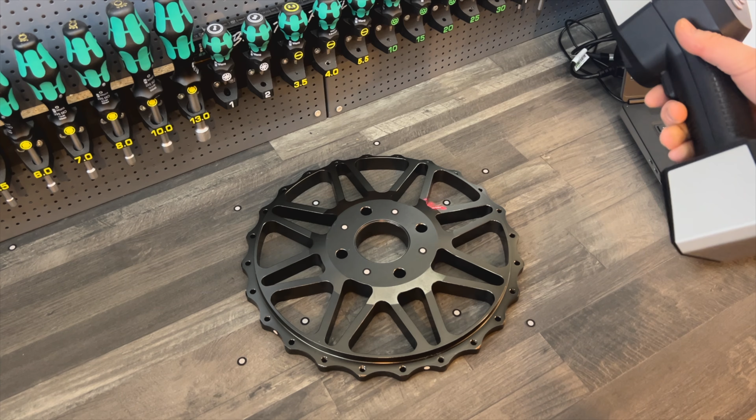So I'll set the point spacing to 0.5. I have reference points on the part. Then I'll capture the reference points, and I have the red laser in the center here. I can use that to determine the correct distance from the scanner to the part. So now I'm just collecting the reference points, like so. Close that and then click next.

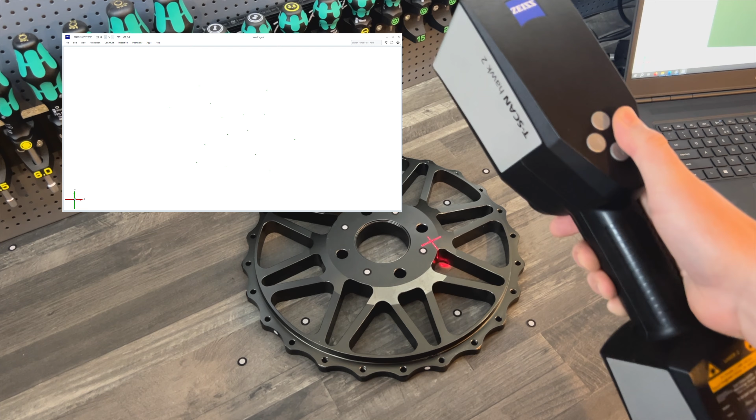I'll define a background plane, and that's the points I put on the table, and then an offset of 3 millimeters, and then everything below that will be deleted. And now I'm going to scanning. So I'm scanning the part here, and because this is dark and quite shiny, I'll try to use the exposure mode dark and shiny instead.

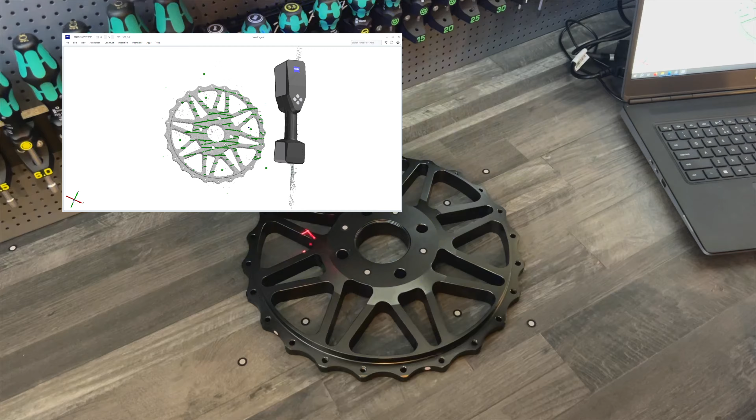So this was the one side. I can then click next, and then I can scan another side. So change this here, and again collect the reference points. So this is a new scan series. And then define the background plane in this as well. Go into scanning, and it has remembered the exposure mode, so I can just continue.

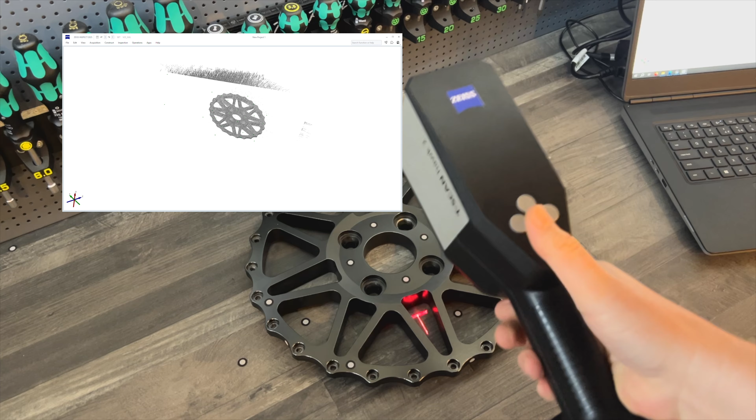So in a couple of seconds, I believe I have everything like so. Then I can click next, and I can transform the measurements. And because the points are both on the table, I can go in and do it over here. So all the points, and then just select the ones I have on the side. Go in and say finish scanning, and polygonize. And this will just take like a couple of seconds.

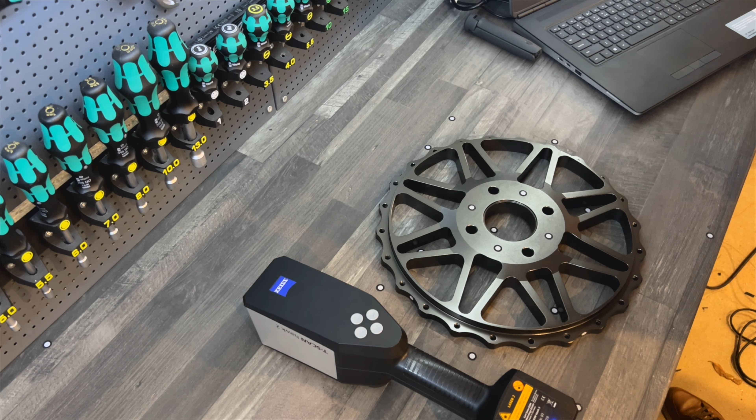And now I'm at the screen, and I can check with my mouse here. Yeah, and this is a reverse engineering for one of my good friends for his race car. He wants to change this part here, so I'll be drawing it up again. So the idea here is I want to show how you can get the most out of a 3D scan with free software. I'm using Zeiss Inspect 2025, and afterwards I'll be constructing in Fusion 360 with the hobby license.

So here in Zeiss Inspect, I want to construct an alignment, because now it's not aligned with anything. So if I select here, you can see that the part is not straight according to the coordinate system. For this, I need to construct some elements. So I want to use the mounting surface here. So I'll go in to construct a fitting plane. And then I want to construct the cylinder in the center here. So construct fitting cylinder, selecting in here, and then lock it with this one of the bolt holes.

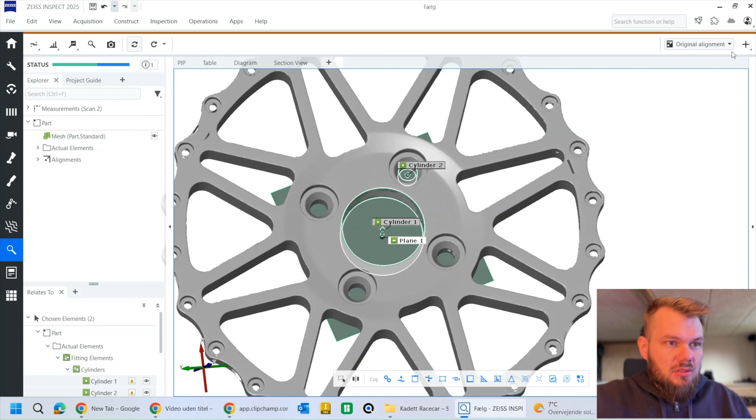So I'll go into my alignment up here, and the geometric elements is not up here, so I'll just define the original as initial, and now I can go in and choose by geometric elements. So first I select plane 1, I'm holding down control. That should be my plane Z, and then my cylinder 1 should be my line Z, and now the cylinder 2 should be my line X. Now it jumped into the coordinate system, so if I look here, this is what it looks like. So it's aligned to the coordinate system now. I'll just press OK.

Because in Fusion you can't import points and sections and so on, I'll just do an inspection report in Zeiss Inspect and use those numbers to construct in Fusion afterwards.

So here I'll take my mesh and drag it out. Now I need to construct what I need to use in Fusion.

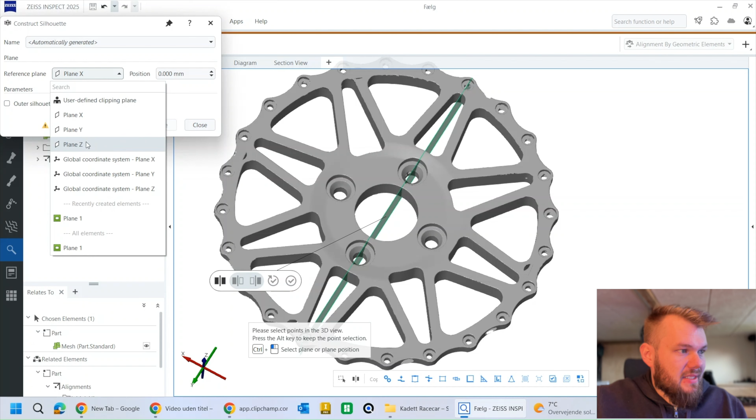I will construct a section, and then I can do a silhouette section, using the plane Z. That's also the mounting surface on the bottom, and if I set this to 0, this will be the 0 in the coordinate system. Then I select all down here, create and close, and press E for exclusive, and now I have the silhouette of the rim down here. From this I can start constructing the elements I need to measure where everything is.

First I'll construct a fitting circle in the center here, circle 1, and if I align it, you can see this one up here. I will also have a cylinder here, and I want to have this one as well.

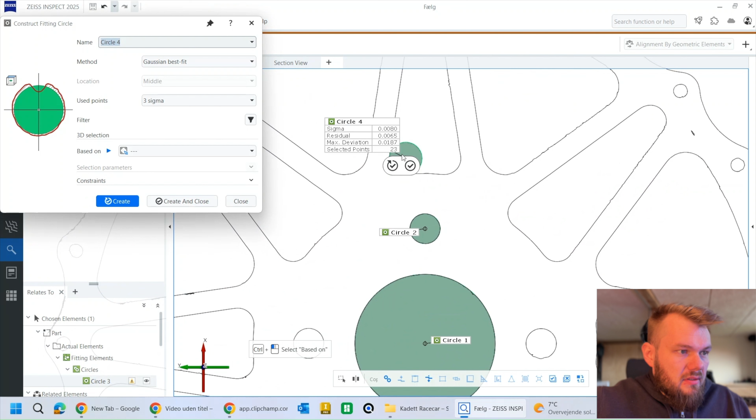In Fusion I'll just know the number of holes up here, and then I can construct it there. I also want the dimension here and on the other side, and then the top, and then from this here and here and over here. I can see it didn't get everything in, so I'll try clicking again.

Now we got the correct one. Then we have this triangle, and then this over here, that's different as well. So I'll construct these elements here. Then I need to have the big circular thing from all of these.

So I will do some selections here, and in Fusion I will probably need to adjust these, because this would be a point-something dimension.

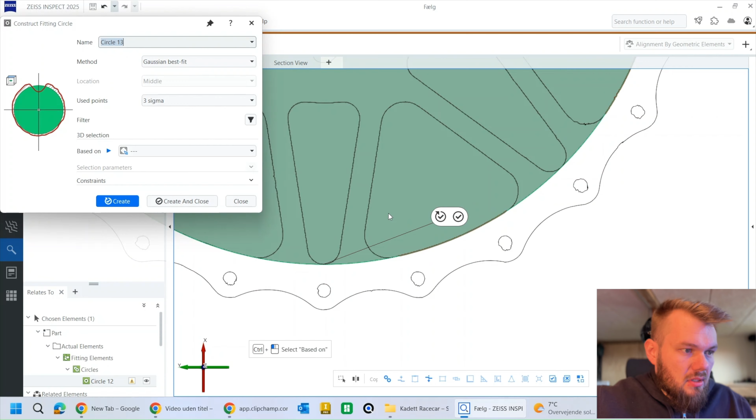Let's select all around here, and this makes more sense when you see the actual diameter of this here. And then we just need this up here, and then we got it all. So this, I have the big one, great.

Now I also want it for this, so the longer triangles, and then afterwards I think we have almost everything. Then it's just the outer thing here.

So now I will turn off circle 13 by selecting and pressing I, and I'll do it again here. So this one, and I'll make sure I don't select any of the curve, because then this will be way off.

So the software is just doing a fitting element from the selections I have done. So I have this one here as well. And then I want to have the small one up here. So I'll do the selection again. We got this, and then this one, and I'll do a selection here as well.

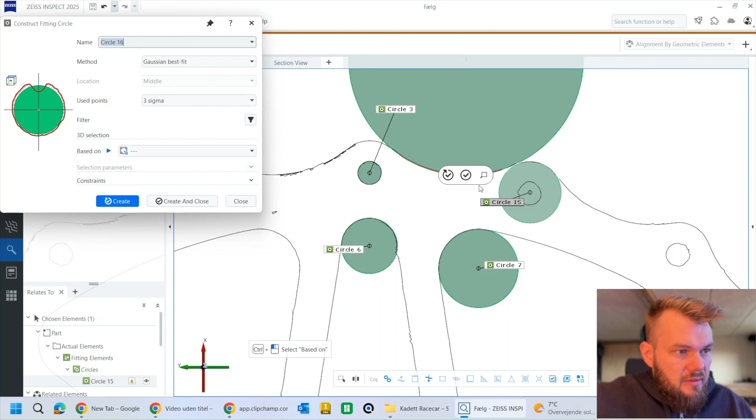I actually think we have most of what we need to construct this again, so create and close. Now I just need to do some dimensions.

So I will open up my geometries. I have my fitting elements, and then my circles, and the number 1 is the center. I'll take that and drag it out. So this is this one here, and a triangle.

So I have here the bolt hole and one of the triangles I need to measure, and then the outer bolt hole. So I will go into construct, and then I need to construct a 2-point distance from this, and we'll take this one here first. But I can see it right here.

I will do a complete inspection, so we get an inspection report that we can look into when I'm in Fusion 360. So great.

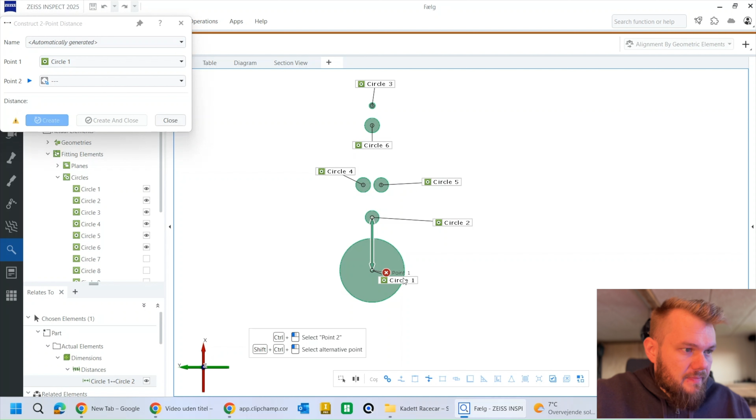And then this one here, and this one up here. You can do this one as well, and then the last one up here, pretty close.

Now all of these are selected, so I will open my Inspect and go in to check a distance in X, and press OK.

So if I take this one and select the dimension, drag it out here, and I can turn this off. And then this one, like so, I can turn this off, and this one here.

And this one. Take this and drag it out here. And then we have this one.

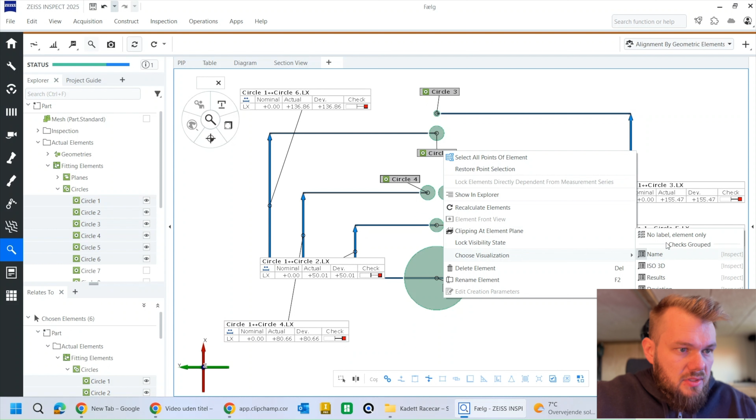Now I can select here what I don't need. And then I'll just select the circles here, press right click, choose visualization, and no label element only. Now I want to turn on my section so we can see the inspections here.

Then I'll take a picture for a report page, and I want to have it as a 3D like this, and then I'll press the edit button, and then we can go in and edit this so it will make sense afterwards.

So take this here. I usually like to do it like this, so it's easy to see what we are working with. And this here. And then we have the last one, like so. So now you can also see the numbers.

I don't have a nominal element, and that's because I don't know what it should be exactly. And then I will have the actual, so that's the measurement itself. So 136, 50.01, and this, where do we have the other side?

So that was to the bolt hole, and 155.47, 80.64, and 80.66. I also want to have the distance from this here, from the center.

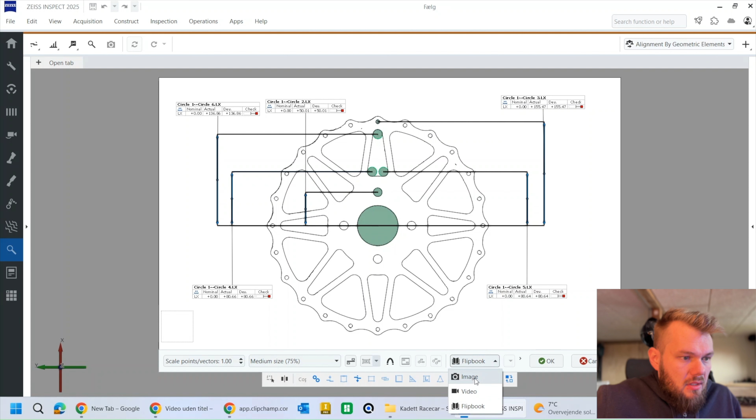I'll just say image here and press OK, and press OK to this. So this was the...

My dimensions. So this one here, circle 1 to 5, my actual elements, dimensions, distance 1 to 5, this one, and then we can do a check in Y direction. Press OK. So we get this.

Actually, I think I'll take it, drop it down like this, and then we can turn this off again and do another one and edit to make it look a little better.

So this one down, this one up, and this one up. So now this makes sense for me, so I can start constructing this here. Press OK, and OK to this one.

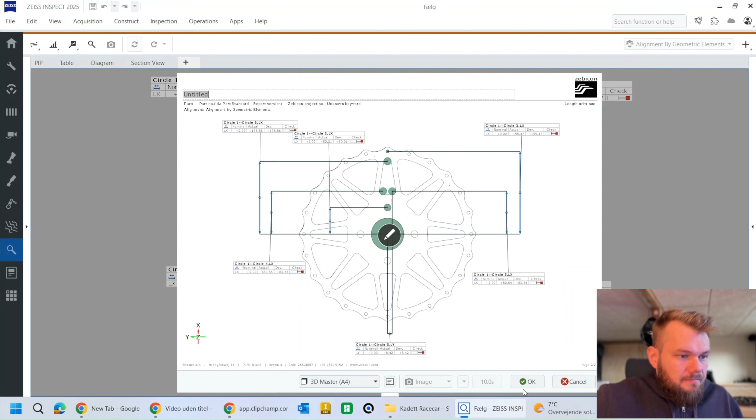And now I want some of my other circles, so I will turn these off. So this one. So select this, and press E for exclusive. So now circle 7, 8, 9, 10.

So I want to do the inspections here as well. So construct, distance, 2-point distance, and of course I need the center, that's circle 1. So from circle 1 to circle 7, create 1 to 8, 1 to 9, 1 to 10, 1 to 11, and 1 to 12.

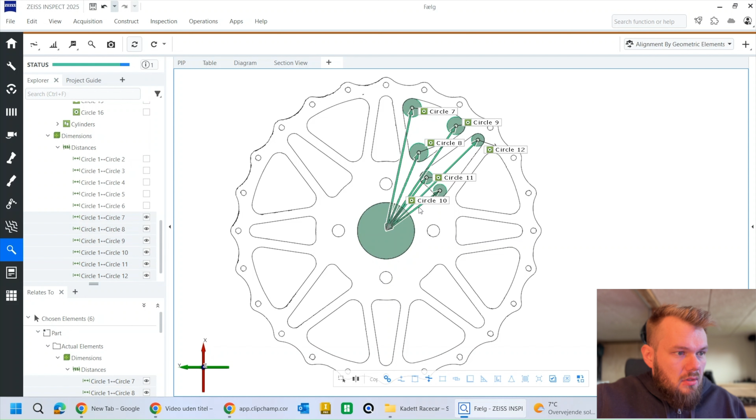And all of these I want to have both the X and Y direction. So this one here, I actually have to select them all, because I want X and Y for them all, I can go in and press X and Y. And now I have these dimensions here as well.

So this quickly gets a little crowded, so I will try to focus a little bit, turn off the circles so it's easier to see. And then we can take this one, and then this one.

And turn this off, and then we will take this one, and then this one, and this one. Then we'll take this out here, and this up here.

So this quickly gets a little crowded, and then we'll take this and this, and then we'll do this one here, and then this one, take it down, turn this off here, and then this one down as well, turn this off.

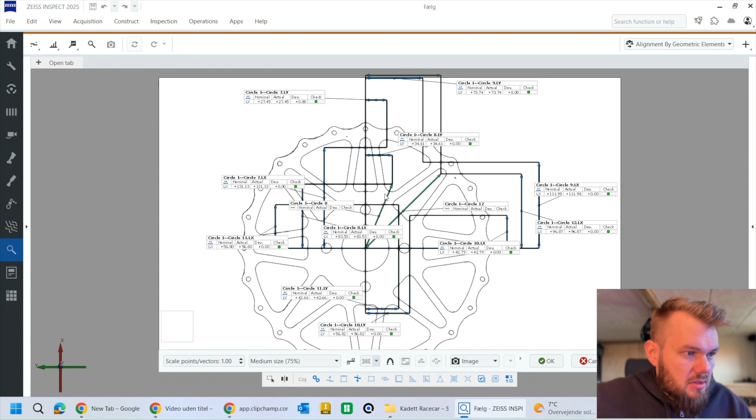And now I'll take a picture again from my report, go into edit to make this easier to look at, and I want to put it here, so like so.

Yeah, then we take this one. I actually want to change these out. And drag it up. Yeah, and then we have this one, I can turn that off.

Now we have this here, this out here. So can it be on one page? I hope so. This one we can take it out, all the way out here. And then this one here. And this here.

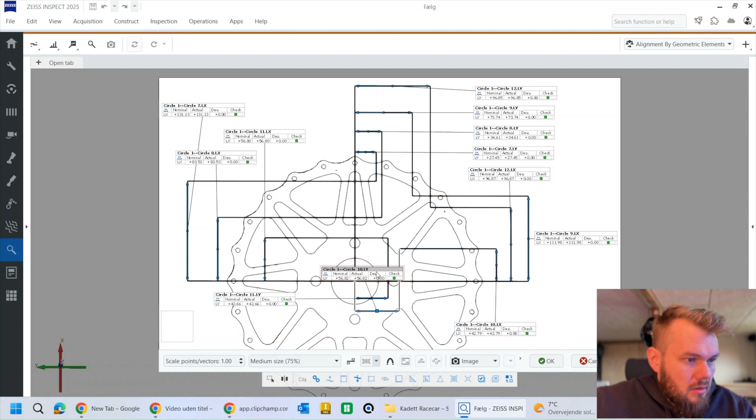There, okay. And so, and this one here, and then press OK, and OK to this.

So now I have 2 report pages, and this here was the first one. I don't want to use that, so I can just delete it. So I have these 2 I can use to go into Fusion with.

And now I have Inspect on my Windows PC, and then I have Fusion on my Mac over here. So I'll jump over to my Mac and start constructing from this. And if I need anything, I can just go into Inspect again and take a look.

Okay, so now I'm on my Mac. I've changed the camera angle a little bit. I'm on my Mac, it's over here, and my PC is over here. And I'll start drawing everything in Fusion.

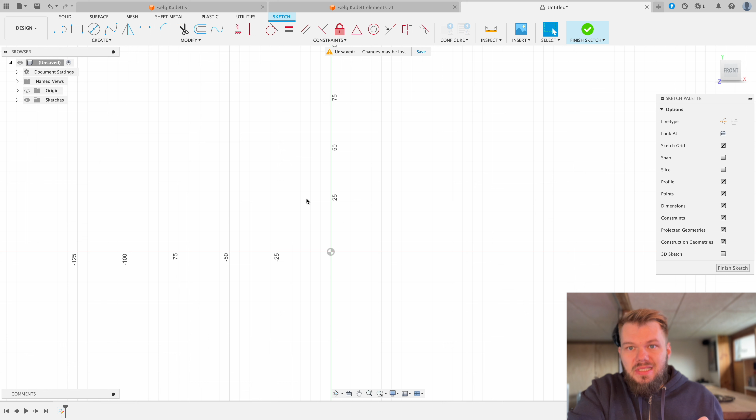I'll create a sketch here, and then I can have a look at my inspection. And one thing I didn't get was the center diameter of some of the circles, so I can do that.

So I will select circle 1 and then just check a diameter.

So that's 60.38. I'll set to 60, just 60, I think. So construct a circle in the center, that's 60. Let's say 60.25.

So that's the first one. Then we need some of the other circles. And I will check the diameter on those as well.

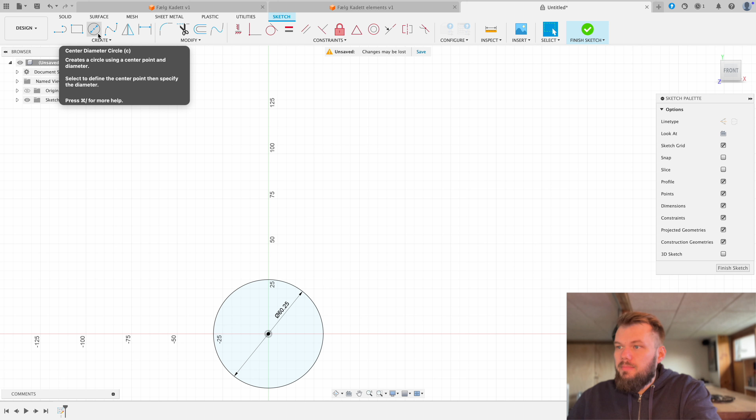So the bolt hole here is 13.08, so 13. And then the next one up here is 14.08, so 14. And then another one. Oh, went a little too fast. Try again. 14. And then the last one up here was, let's see, 5.95. So let's set that to 6.

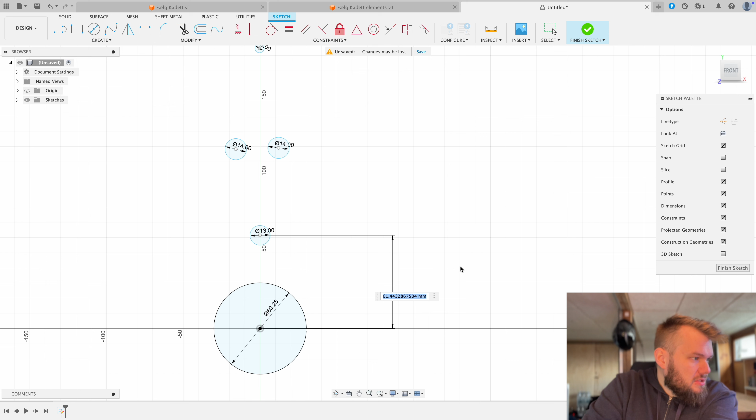Then I need to set this here, and the distance on this one was, I'm looking at my PC, the distance from the center to the first one was 50.01, so 50. And then from this one to here was 80.66, so let's say 80.5.

In this direction, and then this distance here was, let's see, it was 8.42, so 8.5. And then this one should be 80.5. And then from here to here, 8.5.

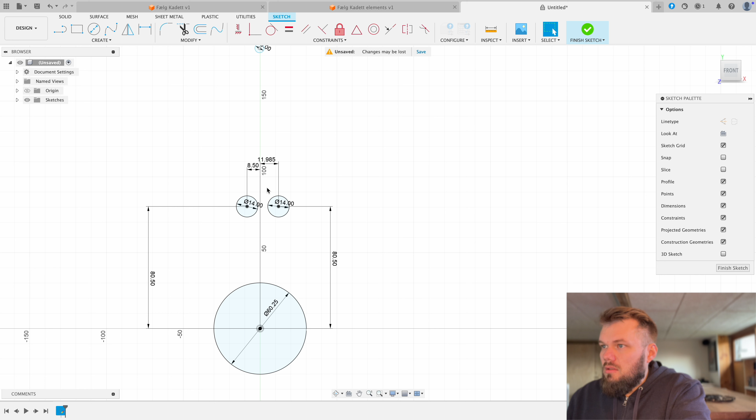And this was 13, I believe. Yes, 13. And then distance was 50. And then we have the last one up there, and that was from here. That was 155.47, so 155.5. Yeah.

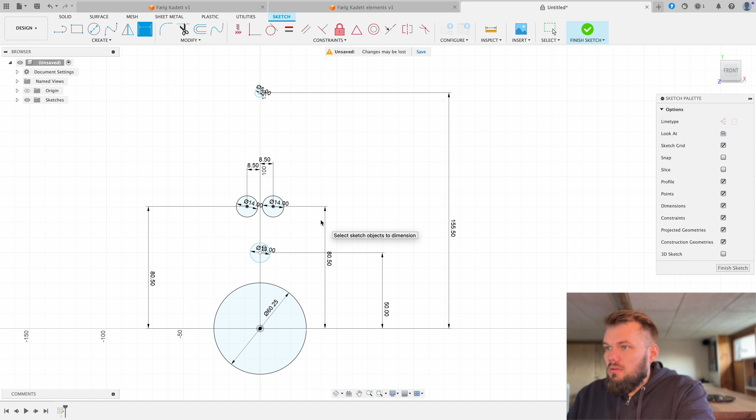And then we can go in and have a look at the second report page I did. And we also need the diameter of those. So, and we're missing one. So this is the great thing about working on two PCs, two computers. Here, and check the diameter on this here, and that was...

14.18. So we need one up here as well, and that should be in the center. So just get it to log in here, and then this, and then 14, and then the distance on my report, that is 136.86, so that's 136 point, so 136.85. Yep.

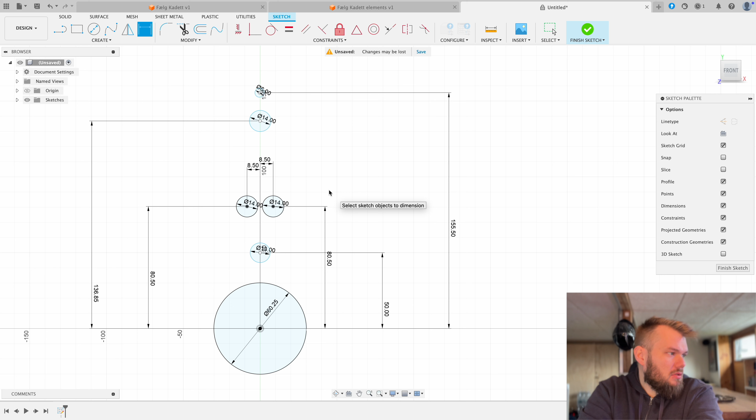So these were the first, and then let's have a look at the second ones. So 7. I just checked the diameter here as well. So they are 20.07, 19.23, and 20.02. So 20 for the 3 out here.

And I'll try to get them closely. So, 20, and 20. And then I can do the dimensions. So this one is 80, that's not true, yeah, 80.5.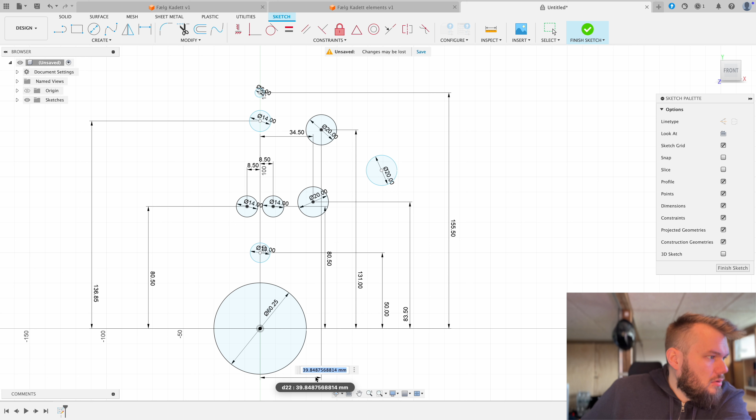And then this one up here, from here to here, that should be 131.1, so 131, and then the other direction, take that down here, and that should be 27.5.

Good. And then this over here, that should be 112, 112, and then the other direction should be, let's see, 73.75, 73. Let's say 75. Yeah. So this was the first triangle here, the second over here, and then we'll do the last one over here.

So, and we need to check the diameter of those as well. Circle 10, 11, and 12. Select them all, and then I can check diameter, and they are 39, 14, and 14. So 14.

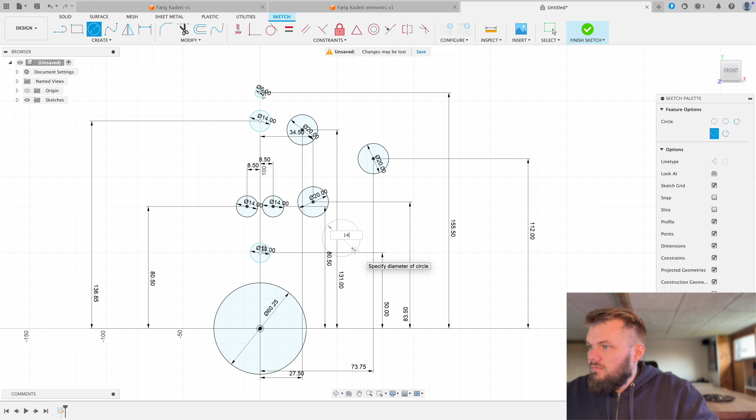So 3 here, that's 14, and 14, and 14. And then again, sketch dimension. Take this one here first, and that should be 56.8.

And then this way, and that should be 34.5. And then this one, it's there. I'll zoom in. 42.8. 42.8.

And the other direction, that's 56.8. 56.8. And then the last one, that's 96. 96.9. And the last here, up there, that's 96.85.

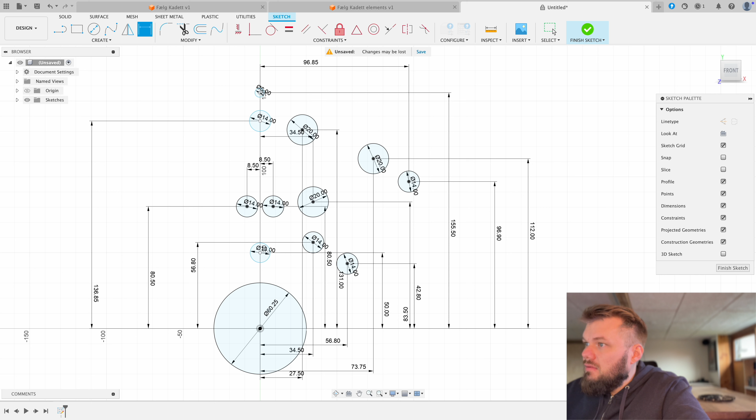Yeah. So from this, we can start drawing some lines. And let's see. So do we have a curve in any of these?

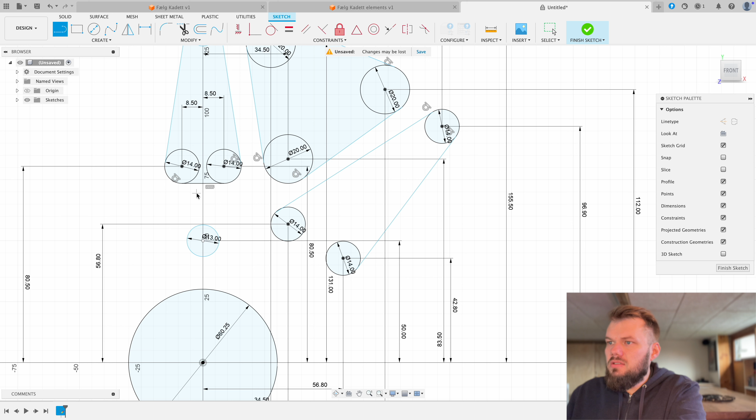We have a curve down here, and also on this one here. So, and then a curve here, and this also should be a curve in this one. So I'll just delete this and then do a circle from the center. These two. They are not from the center. There's something wrong here.

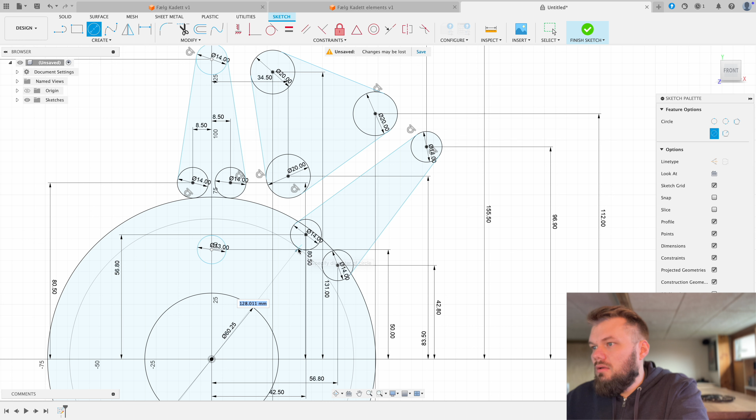So this should be 56.8. And the other one should be 42.5. This one here. This looks more right. So now we want the outer dimension. The outer dimension, we'll make that a circle as well. We'll just make it big enough, and we can cut it away later.

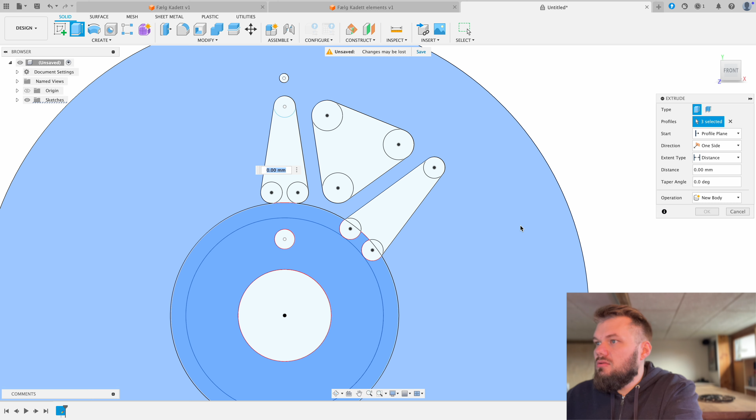Now we can do an extrusion. This here. And this is of course not how we fix that. So press here. Press OK. So let's see if we can just do a press pull. Let's be happy with this here.

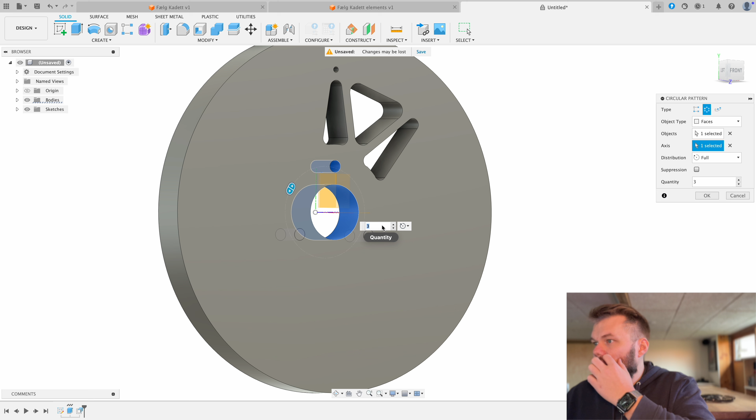And now I want to, so this one here should be 3 times. So I'll do a pattern, circular pattern on the faces. This one, and axis this, 3. It's okay. And then we'll do another pattern, circular faces. Take all of these. I actually want to wait with this one to fix this down here. And these are 1, 2.

Oh. 1, 2. I can't count. 1, 2, 3, 4, 5, 6, 8. Axis. This one. Okay. We get there. We are getting there. Okay, did that as well out here. Place here. -5. Cancel.

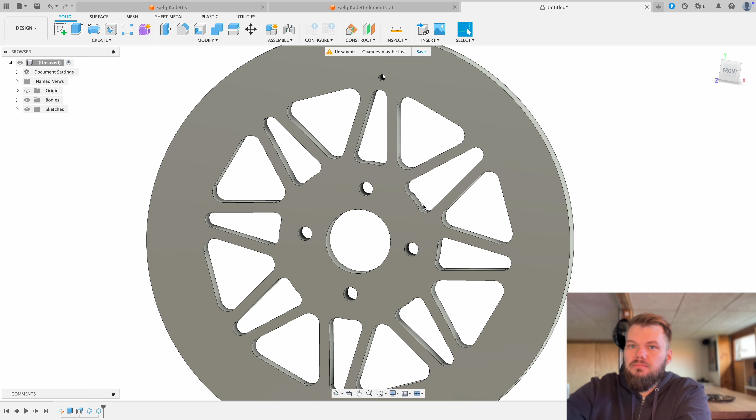Okay, so I just did a little test to fix this small issue. So I actually want to go back to this place here, and then this circle out here, because it's not hitting the circle in here, I want to move it, and the best way to get it mirrored is to delete this and this.

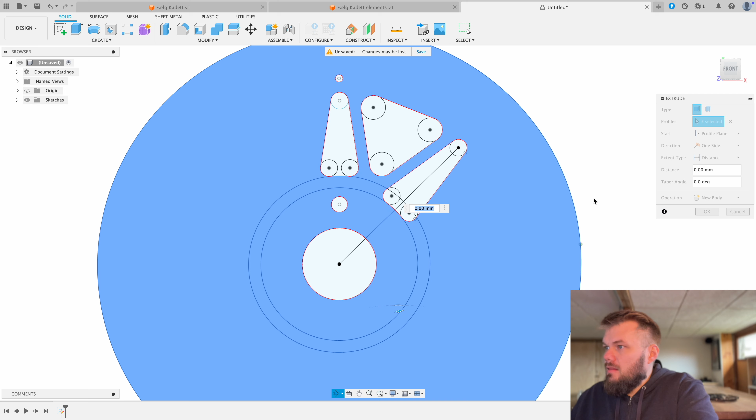And then I want to do a line. So line and okay, and then do a mirror from this to this, and actually I also want to mirror this one. That's okay. So now it should be correct, and then we can do the extrude. And this one. Not this one. Yeah. We can extrude it just 50.

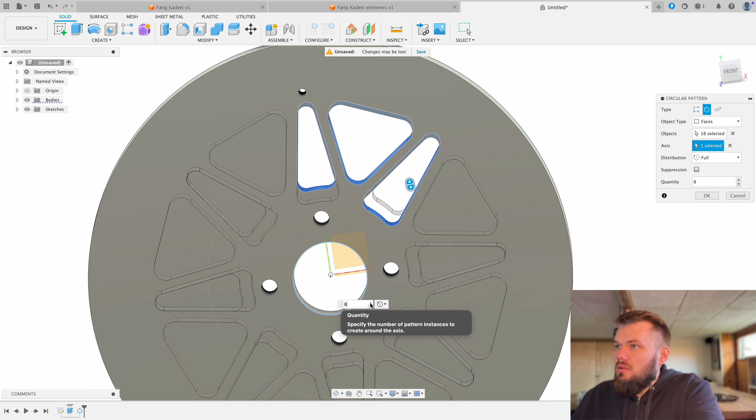And then again, do the pattern circular for this one, and the axis, 4. Okay, and then we can do a second pattern. This here. And axis here, and it was 8, I believe. And click. So not all of them. Okay. So I can see here that they're doubling.

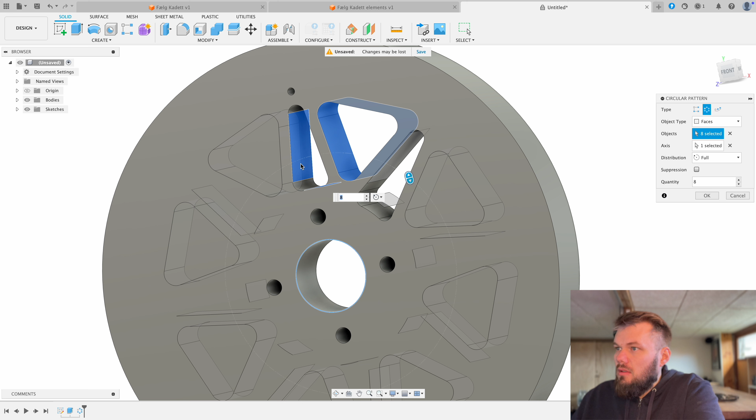So we can go in and do deselect, and so actually we only want the big ones, should be 8. And so these are 8 times, and circular on this should be 4 times. That should also be 4. Okay. Yes. This is more like it. Now it's starting to look like a rim.

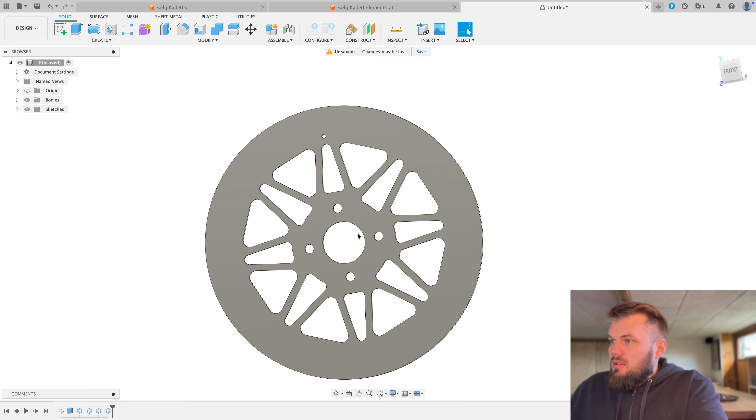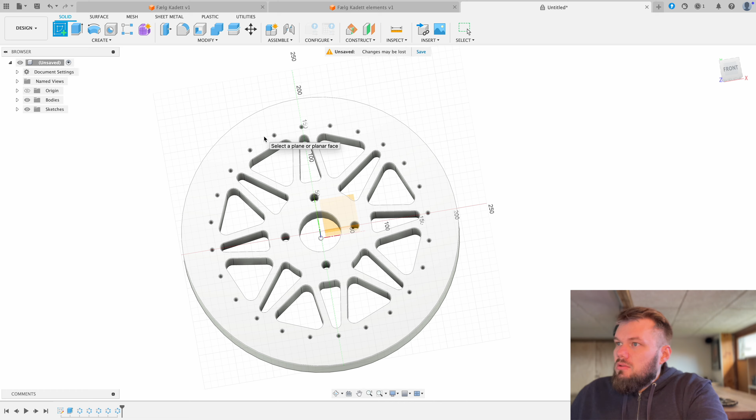So now I want the small ones over here, and I need to count. So again, I have this over here. So 3, 4, 24. So pattern, circular, this one, and 24. Okay. So now we want the outer, and I actually have it. So we want this up here, so I can cut it out. So I'll create a sketch. And did we do any of these? We did.

So circle, 16, and the distance I will do from center out to the outside. So you just have to believe I'll do a 2-point distance. And then check the distance, and this one. So the distance here is the diameter.

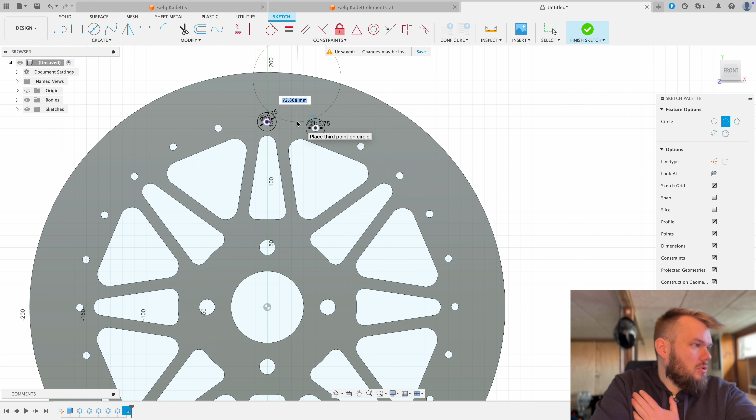So if this was in here instead, if it's centered, probably it is 15.75. And then we'll delete this and do that the same way. So 15.75. Now we just need, can we do a 3-point circle? Yes. So the diameter on this is 59.13. Let's say it's 60. And then the other way. Yeah.

And then we can do a pattern on this. So create circle pattern. And these. And center point. And this should probably be 24. Yeah. And now we can do an extrude. What did I do? I did the wrong one. This should be up here. Let's Command Z. No, it's right. Ah, I got confused by this one up here. So, this is correct. Finish sketch, and extrude. Oh. Yeah.

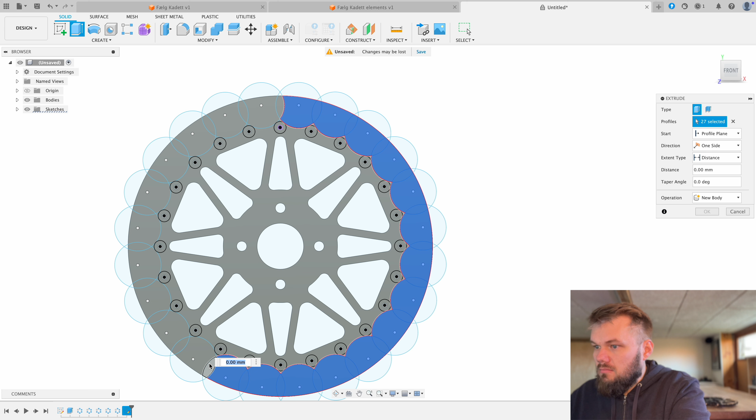Now we only need this in here. It was probably easier to do the pattern afterwards, but now I'm here. I'm doing it the slow way. Cut. Now it's starting to look like the real part. That's nice.

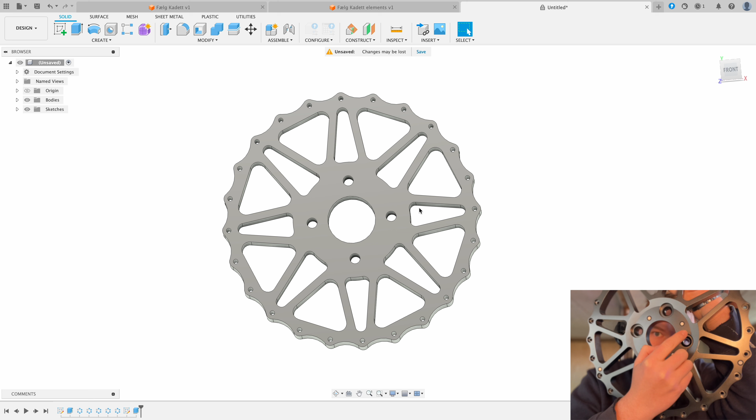So here we just need the surface down here, and some distances from. Can you focus here? This is, so from this edge to the top, and from this edge here to the top as well, and then this here. And then if you look at it like this, we need this edge here, and it should go in a little here as well.

So, I'll start the recording on my Windows PC. So over here, back in Zeiss Inspect, I want to measure. I started everything from the bottom. So I think the easiest way is if I construct the bottom first, and then we measure how long there is to the top.

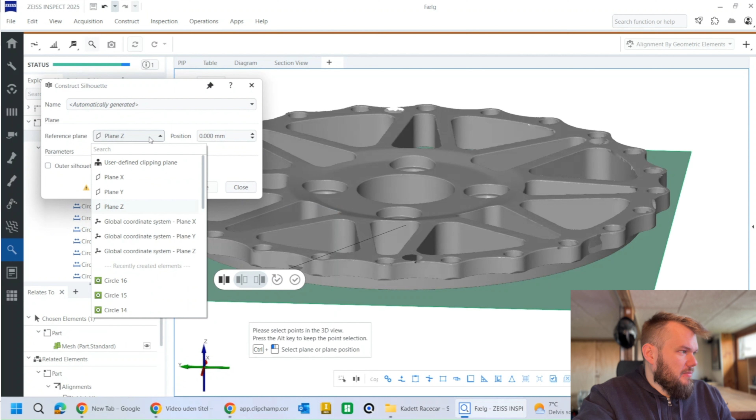So this is flat, and this is flat. So here I can do a silhouette section, construct section silhouette, and then instead of plane Z, I will use plane X, and right click, select all, and create and close. Because it's a silhouette, I can't see the top curvature here, but I can see everything below. So I will press E for exclusive, line it up, and now we can start to measure the distance from the bottom up to the edge up here.

Oh, the light went out. It's these small battery powered lights, but you can still see me. It's daylight.

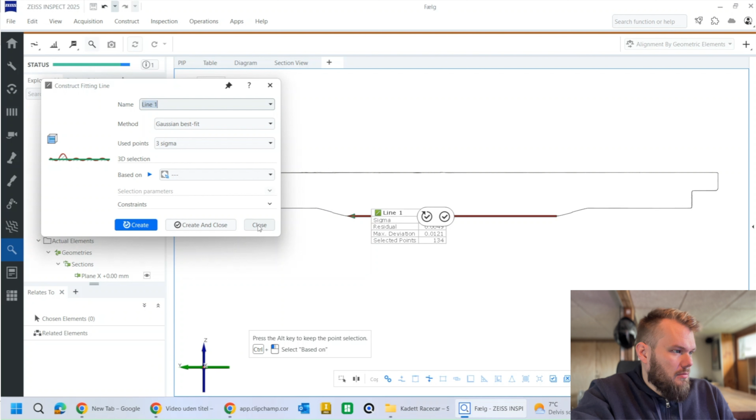So I want to construct some lines. So construct fitting lines, as well as surface construction in CAD software. When you do inspections, sometimes it makes sense to think a little bit here as well. So I have the plane on the bottom. We can just deselect here. So I will construct. What will I construct? I have this plane on the bottom. I can measure up against that.

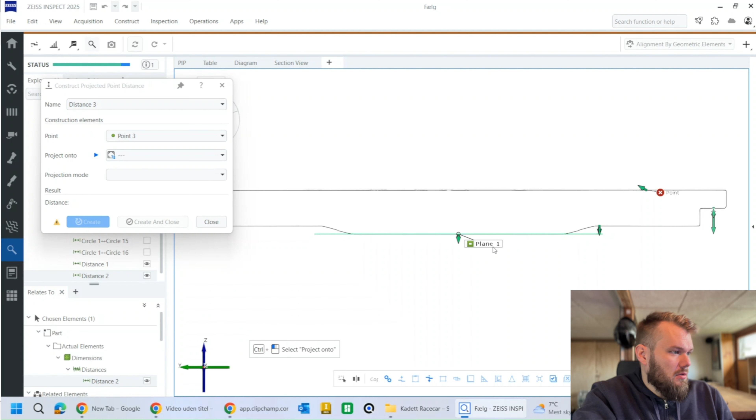So if I just construct the point here, and the point here, and let's do a point on the top as well. This is not the correct way of measuring, but because I want to probably change the number anyway, this is how I'm going to do it. So construct a distance, and now we will do a projected point distance from this point to the plane, and from this point to the plane, and from the top to the plane. And then we can check a distance in Z. Okay. So I have these here now.

And I'll just take a picture of it so we can have it. I'm zooming a little bit, like so, and so I can start constructing this over here. And now I want to do a sketch in plane. What makes sense here? Over here I actually want to have the diameter, so I construct a cylinder here. Yep, create and close, and then check the diameter. Okay. So this here I can use for my sketch.

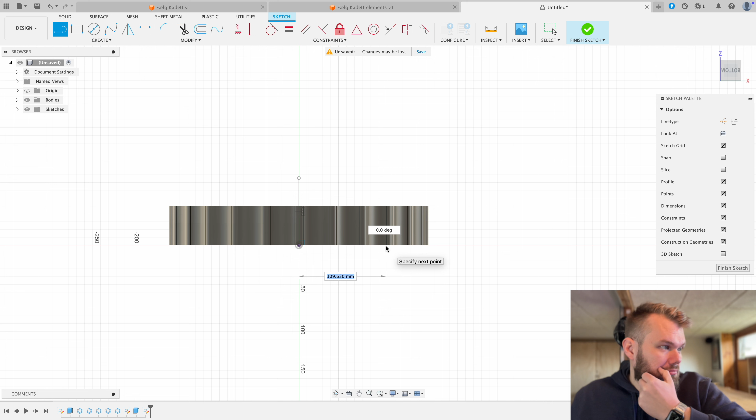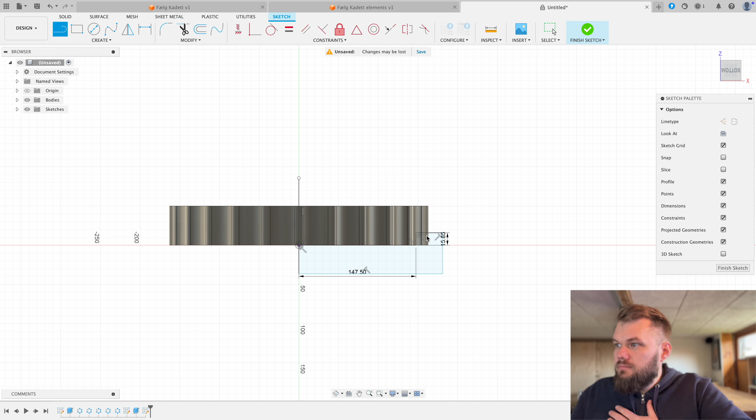So this should probably be 295 and not 294.99. So that's easy. Where's the center line? So this should be 147.5, and then the distance here should be, let's check, 15.85, over here. I'll do a revolve, so that's why I do this. This will be revolved around, and then we should also have this distance here, 27.16, that's probably 27.2, and see if we can get it out here, like so, and just do it like this.

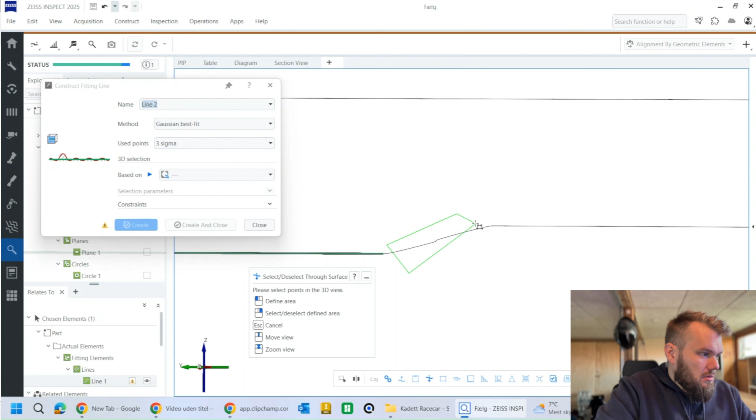And now we want the distance here as well, but I also want to try and find this point here. So I'll go in and check on my section, and here I will construct a line here, here and here, and then where they meet. So a fitting here and up here, and then where this line and this line crosses, so construct a point, an intersection point from this line to this line, and this to this, close. And then we construct a 2-point distance from 0 to this, 0.4, and from 0 to this, 0.5, and then we can check the distance in Y.

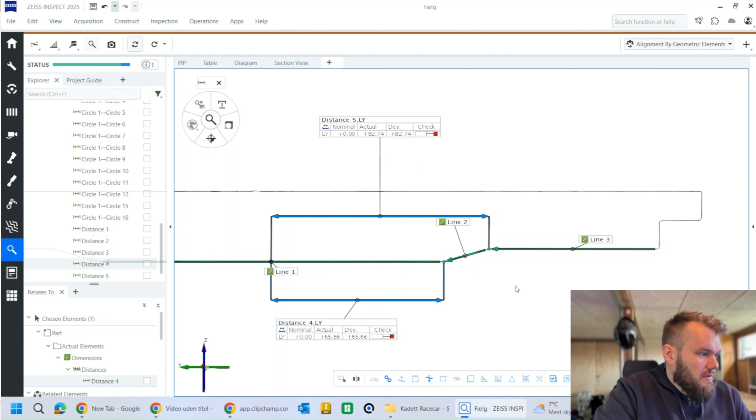This off and this off. So 65.5, let's say. 65.5. And from that distance, what was that? Let's go in and check. So 15.85, that's this. And then we have the small one, that's 4.92. So construct the line, 5. And then from here, back again. Here, 82. Let's say 83.

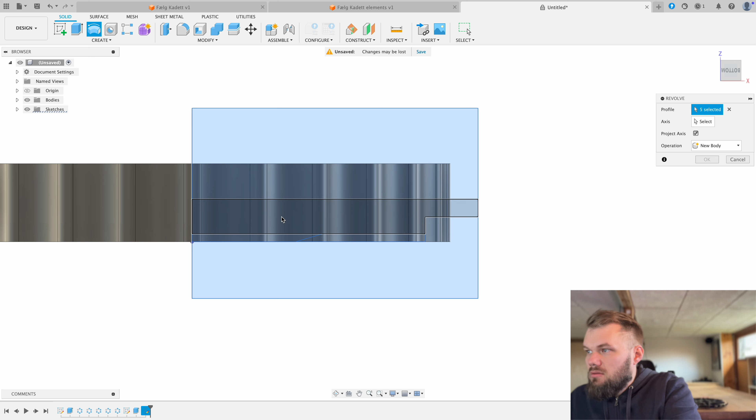Get this to 83. And then from here to there, and from this to this here. Press OK. And now I believe we have everything we can to finish sketch and revolve. This, here, and not this one. And axis.

Something didn't go right. Wasn't this correct? Too much. So edit the feature and press OK. Yeah, nice. Very cool. This is going to be a long video.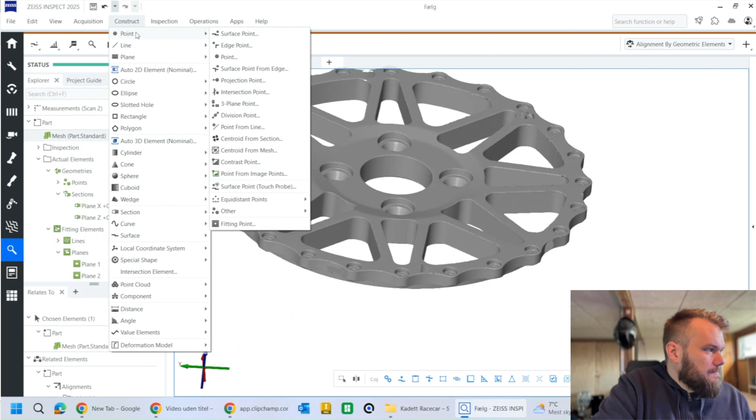So this was the bottom, and now let's do the top. So back in Inspect, take the mesh, and then I'll just construct a plane on top and measure from... actually I want to show a quick measurement. So just construct a disc caliper from this side here to this side. So that's just a caliper.

Then in here I can set the direction, that should be the Z direction, and I can change the radius of this to be 1 micron and select what it needs to hit. So we can see it's hitting there and the other way. So that's 23.899, getting close. And then do distance and Z. Press OK. So 23.9.

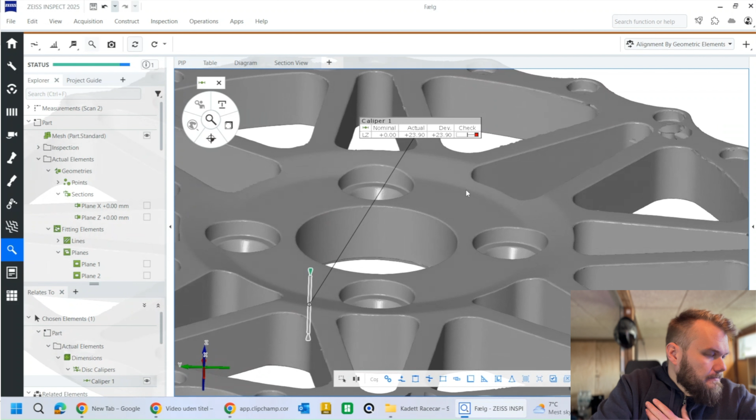So in here I will construct offset, and we still have the Z. Yeah. So an offset of 23.9. And here I want to create a sketch, and now I want to know the circle diameter on this. So I'll construct a section from plane Z, and then we go up. Now I can see I want to hit it right here. There. 24.1. And select all. Create and close. And exclusive.

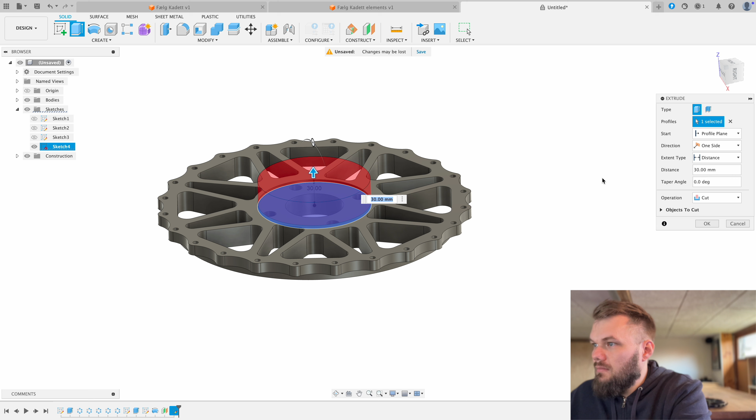And then I want to construct a circle so I can measure a fitting circle. Create and close, and then check diameter 117. So I can go and construct 117. Yeah. And extrude that. Press OK. And then I want to measure the distance from this surface here to the bottom.

So I'll do another, so a surface point from here, and then construct a projected point distance from this to my plane I have on the bottom, so plane 1, close, and then check and Z. That's okay. So 17.65. So again, 17.65. Yep. And then I will do a project on

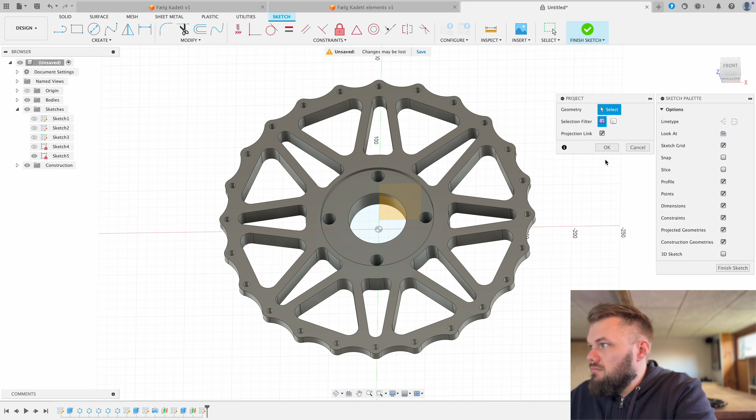Z. Where did I do the sketch? A sketch on this, and then do a project from these. Okay, and then circle. I also want to measure the diameter in here. So fitting cylinder. Create and close, and then check diameter. Okay, 28. So 28.

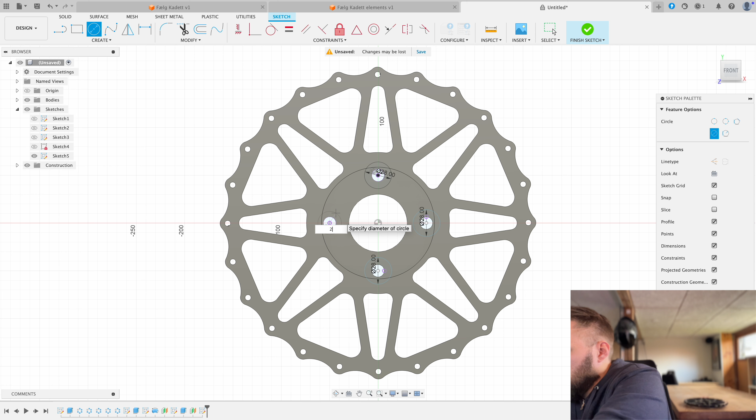And 28. And extrude. 1, 2, 3, 4. Yep. Now we can go in and chamfer this. And I can't do that. Maybe I should do that before. So let's see if I can do this. Chamfer. Okay, can't do that. So I need to, I can jump back, and so I need to do a revolve instead. So we can just do this.

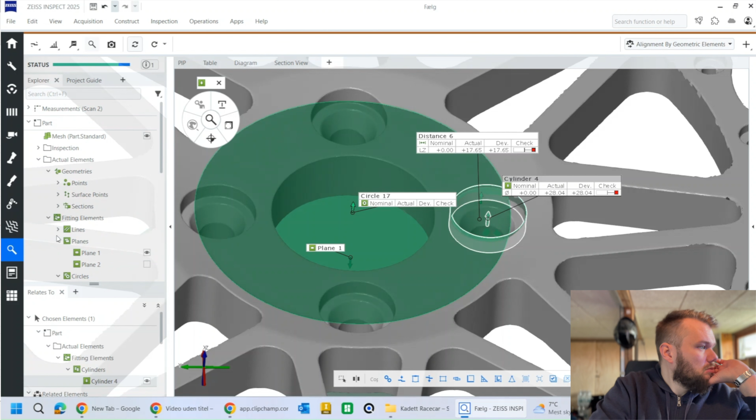And I want to project this. What was that? That circle was, let's see in here, dimensions on circle 17. Distance. On 17.65, and then we measure from the edge here. So I will do this the fast way.

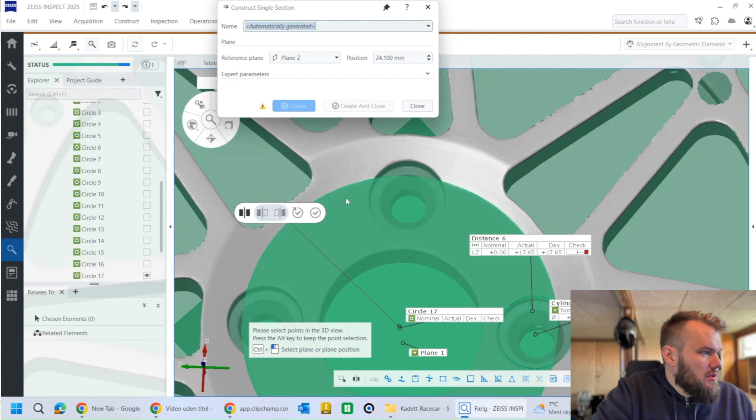So construct a point right on the edge, getting close, and then construct... no, we won't do it the fast way. Control Z, construct single section from Z. And select all, and loose, exclusion, and then construct circle, fitting circle. Pretty close, check.

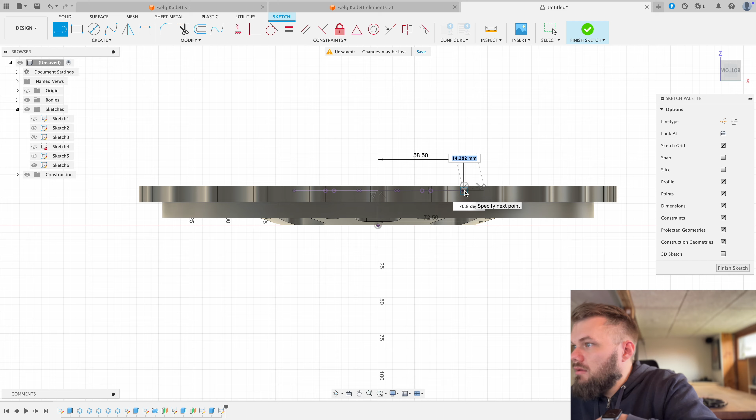Diameter 145. So 72.5. 2.5. Go up. I need to select the right one. This. And because we are revolving, go right here. Okay. Finish and what did I do wrong? So maybe if we do like and try again. Hello. Good. No.

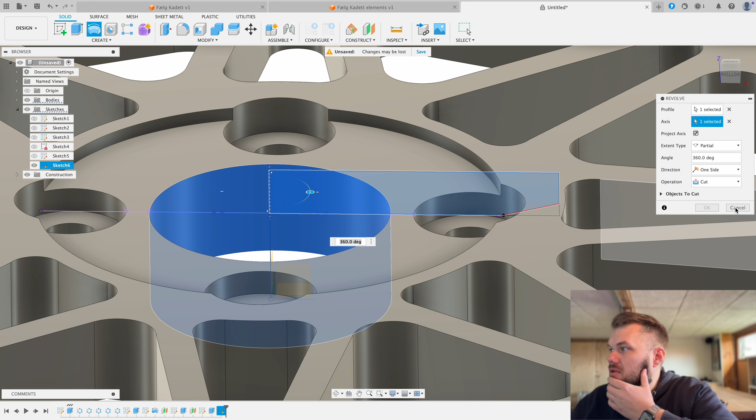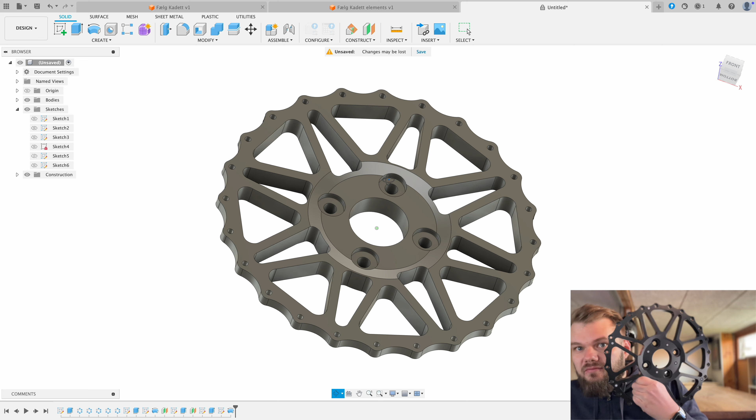Okay, so if we go back and then we just do, and then yeah, and click OK. So the last thing is this in here, and that's the standard for the bolts. So this should be it. Now this looks, and I think the video is going to be more than an hour, but an hour's work for this to be parametric constructed. You can see, if my iPhone wants to focus here, this looks like this. Quite nice, I think.

So I hope I have the time to do more of these videos where I show work in Zeiss Inspect and Fusion, maybe other CAD software, to show how to use these 3D scans so you can get the CAD parts that you want. You can do a lot of things with the meshes from 3D scanners, and I work with Zeiss equipment every day for the inspection, the quality, and so on. And my hobby is what I showed you today. So this is for a very good friend of mine. He has probably the fastest Kadett in the world.